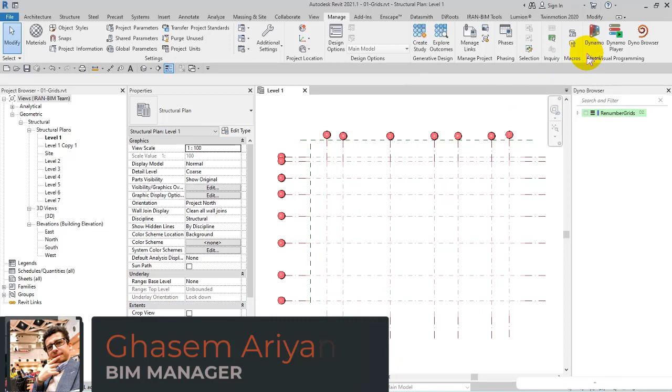Another point is about setting dimensions in the X and Y directions. Since setting dimensions in such a big project is a very boring process that takes a long time - for example, if you delete grids or add new ones, you have to modify them - I'm going to show you a way to do it with Dynamo in a very easy way.

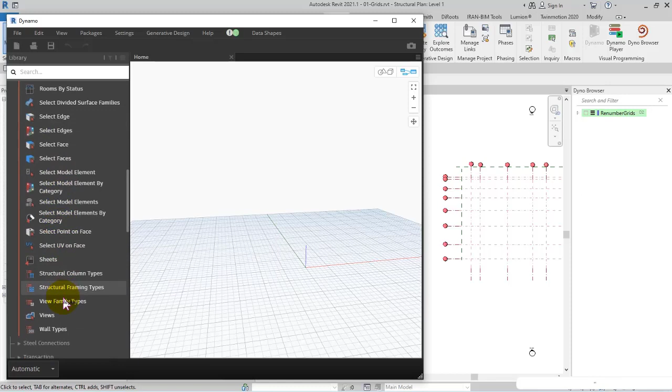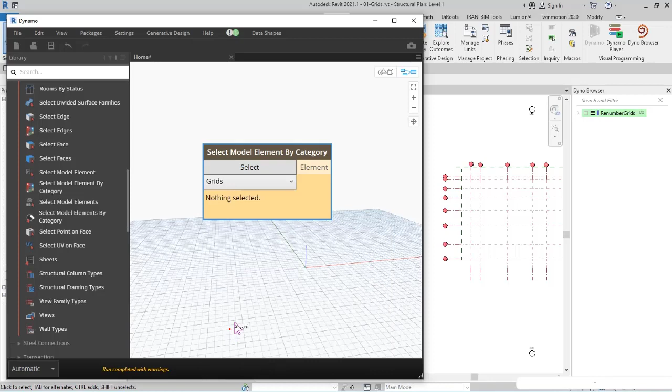So again from Revit, in selection, I add select model elements since we've got a couple of grids. But since we're only working on grids, we can add select model elements by category, and then specify grids to select all the grids in the plan or project, so if I drag the elements in level 1, only the grids will be selected here.

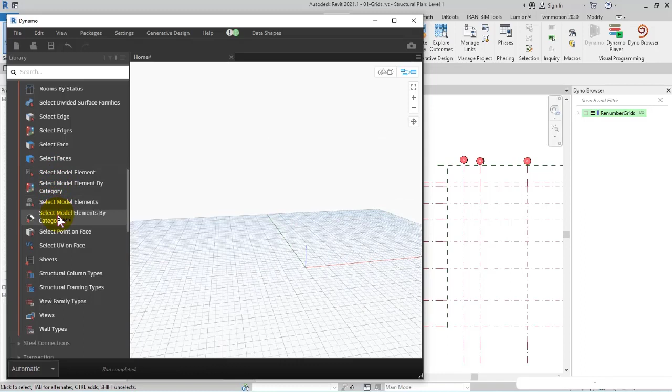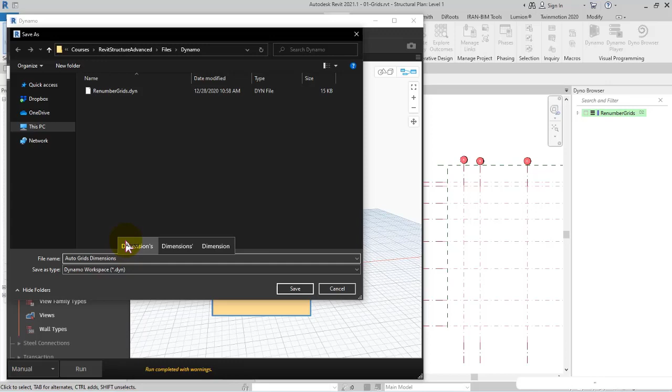But here I have added select model elements, not elements by category. Anyway, I delete them, then look for select model elements and add it here, set it to manual, then add one more select model elements. I save the file, naming it Auto Grids Dimensions, and save the file in this way.

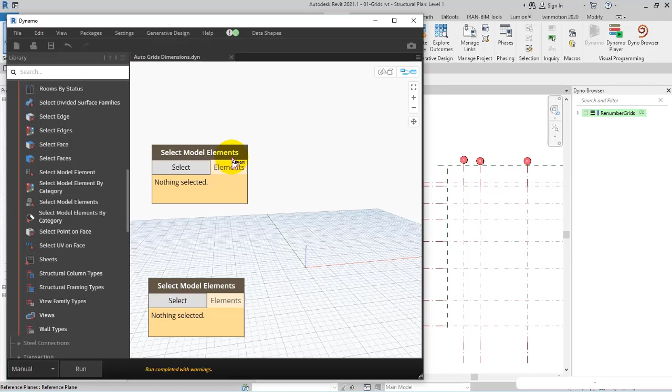After doing this, for specifying the model elements - for example here in level 1 we may have some walls, windows or doors, but I only want to add grids - so to specify the grid lines as the model elements, I search for element.

Filter by name, as you can see - actually filter element by category, which should be installed in the package of Rhythm. So if you don't have it, you can search for Rhythm, download it, and then install it.

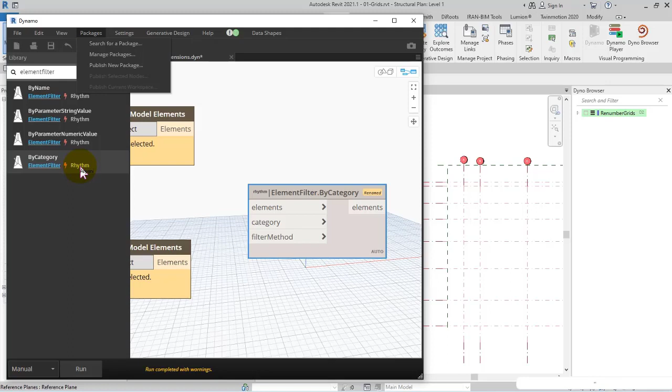I know some parts of this session are hard to understand, but I recommend you get the Dynamo courses and watch them from elementary to advanced.

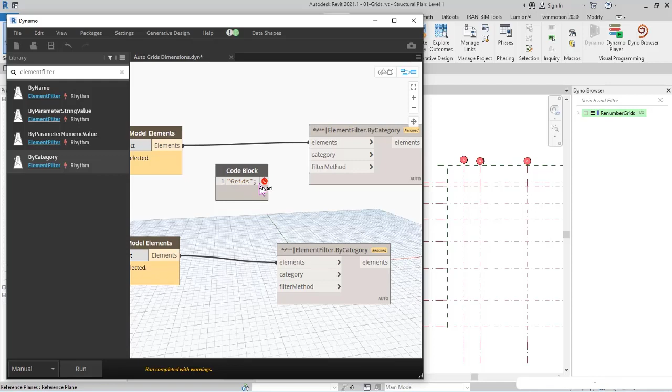So I have specified the elements, and then I add a code block by double click. Then I add a double quotation, grids, in this way to specify the category, so that I want the grids of the plan for the X and Y coordinates. Then on the next line, for specifying the filter method, I add contains, and after a semicolon, connect it to filter method in this way.

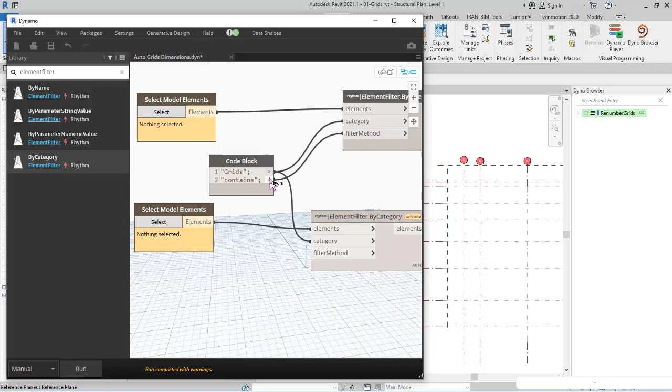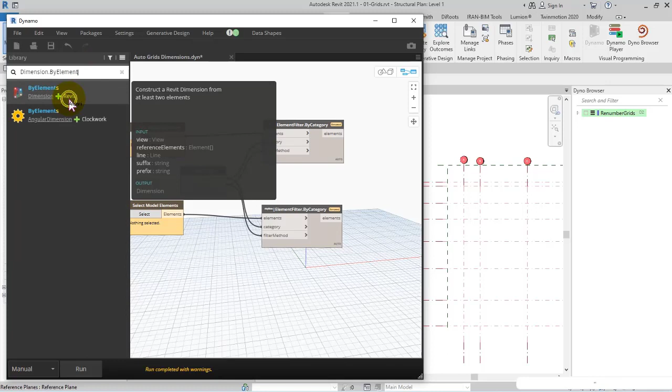After doing this, I search in the search box in the library for dimensions, or dimension by element. This is for Revit and you don't need to install a special package, so I add it.

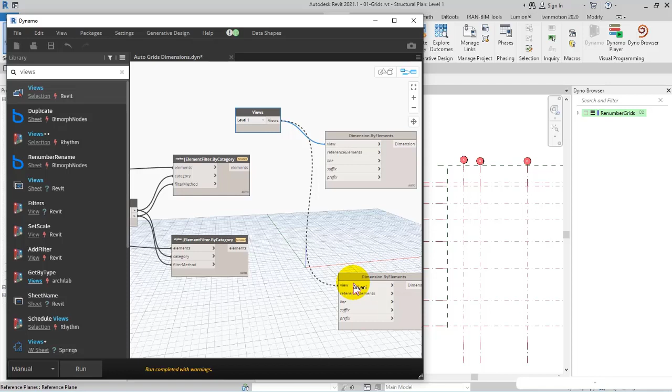Let me find it - here by elements I add two for both directions. Then for specifying the first part, which is view, I search in the search box for views, select the views and add it. I select level 1 and connect it to view, then I connect elements to reference elements.

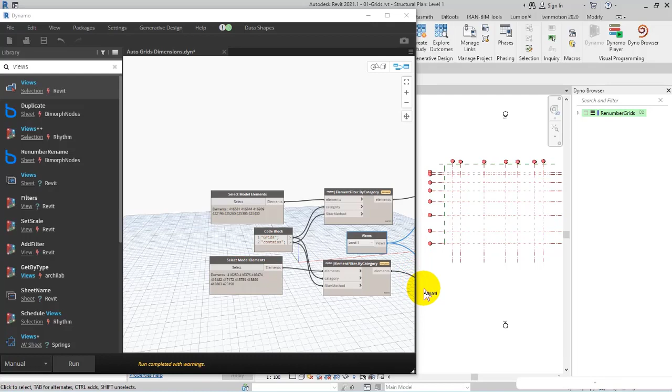I save the Dynamo file till now. After that I select my model elements - the vertical grid lines, and then the other one, the horizontal grid lines - and then I click run.

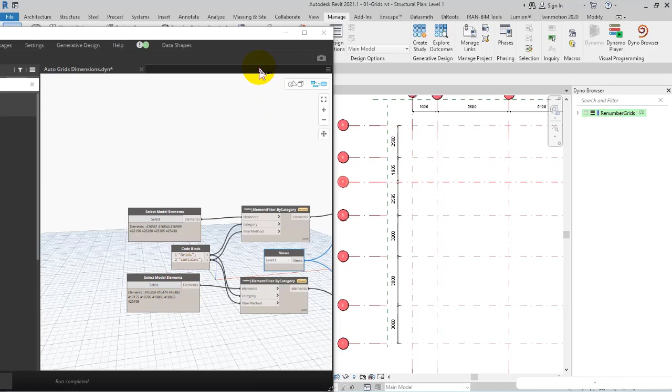Check this out, now the dimension is set automatically. Let me move the lines in this way. Right now, even if I delete one of the grid lines, as you can see the dimension remains here, but I need to renumber them again with just a click.

So I click, check this out, and then I put them in order again. Save.

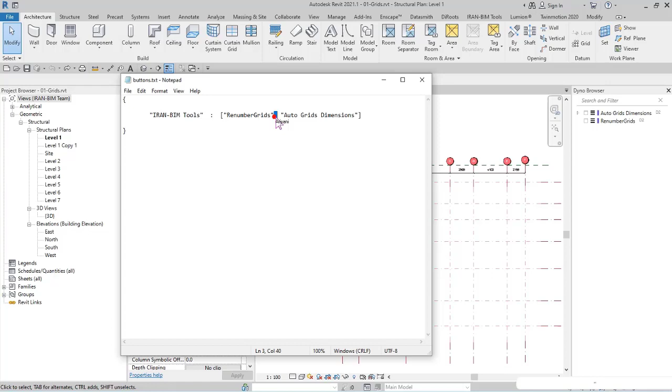Right click, rescan workspace storage, I click on it, and it gets added here, but I have done it before. I right click, open the buttons file, and here in the buttons you specify the name of the file and the name of the script with a comma between them.

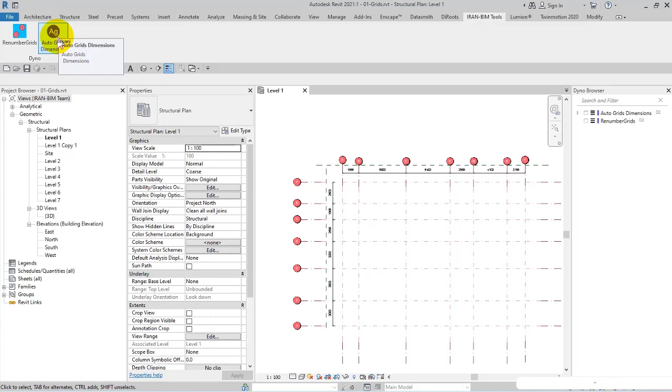Save and close, after that I restart Revit, but this time I haven't created an icon for it. Check this out - AG is added here as Auto Grids Dimensions, and the color is actually chosen randomly. Anyway, this way can help you with Auto Grids Dimensions in situations when you delete grids.